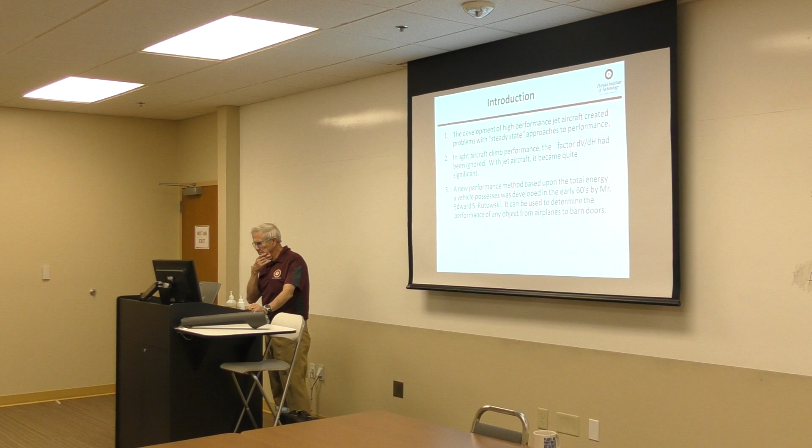One of the things that happened was that with the advent of high-performance jet airplanes, the steady-state climb approach didn't work very well. Number one, airplanes like the F-15 and the F-22, you can't achieve a steady climb at sea level. Both of those airplanes will accelerate going straight up.

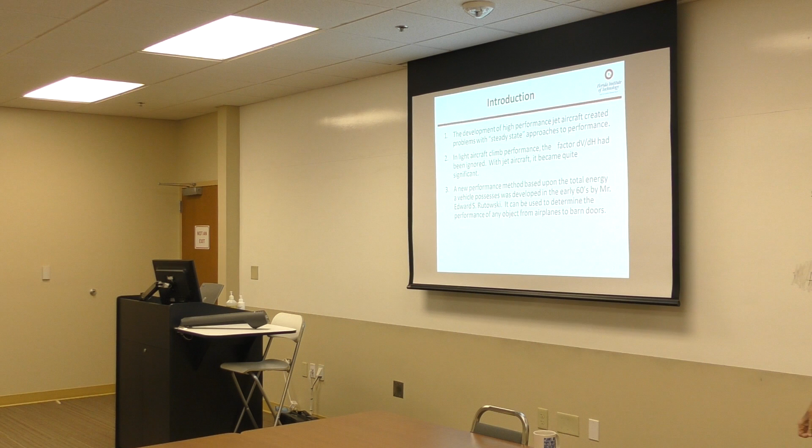So you had to come up with some other way of doing this. The other thing that showed up even earlier than that was that this method we just finished talking about has a problem. If the airplane has fairly high performance, we get into a problem with the change in airspeed versus altitude as you're changing altitude, or the DVDH term. With this method, we essentially ignore that term. That's one of the reasons that using this approach, we only take a slope at that one altitude, rather than doing all of those points. We're kind of alleviating the problem with DVDH, because as you go up in altitude, due to the change in density, the speed changes.

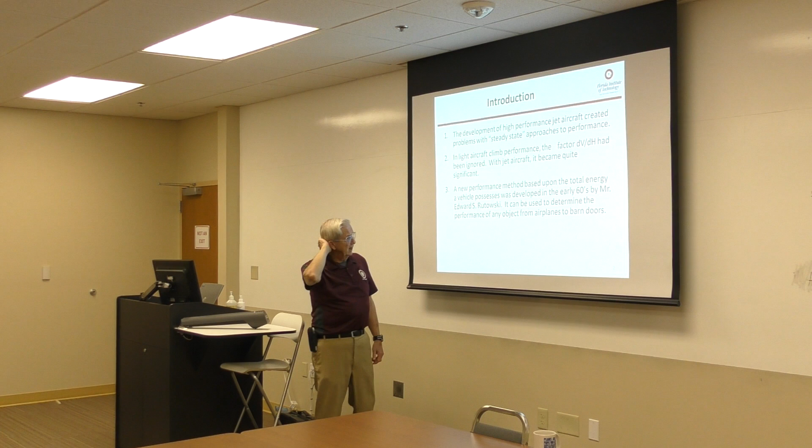So back in the 60s, that kind of raised its ugly head, and there was a fellow who at that time was at Douglas. That's a company that's gone its way, but Donald Douglas was one of the starters of the airplane industry, along with Bill Boeing and DC-3s. Essentially, when he built the DC-3, he almost put himself out of business, and then when he got to the DC-9, he did put himself out of business.

Why? Wasn't the DC-3 a successful airplane? Oh, the DC-3 was a very successful airplane. I went to war on the DC-3, okay? So DC-3s were around for a long, long time. In fact, the first airplane that we modified for the gunship program had its first IRAN, which means an overhaul, essentially. Had its first overhaul the year I was born. And this was in 65, when we did that airplane down in Miami. So yeah, DC-3s were around and were used very extensively in World War II.

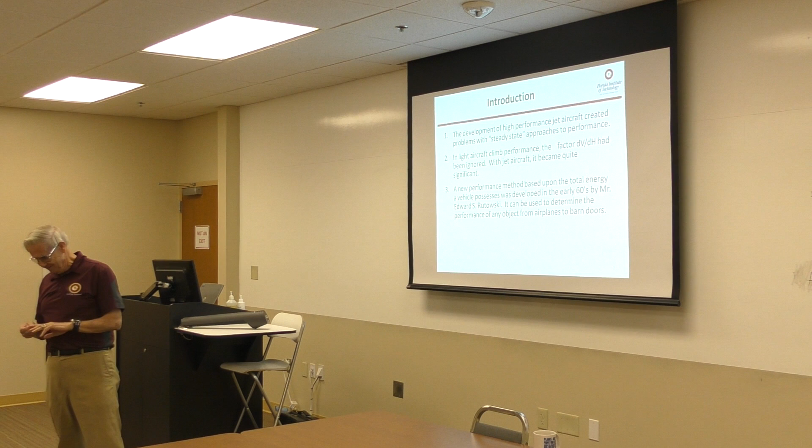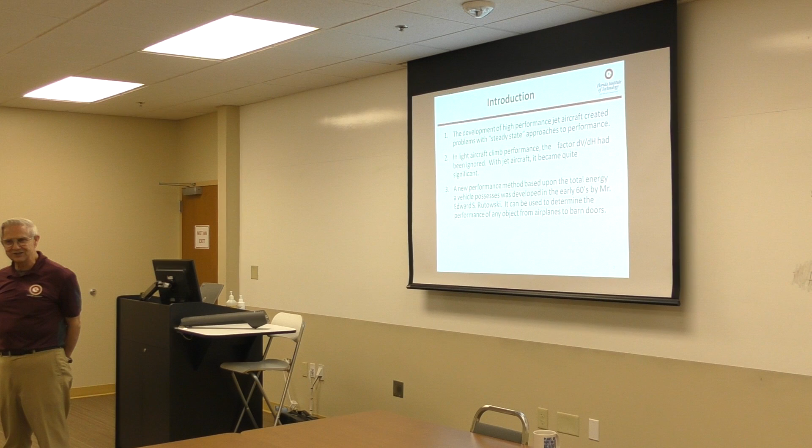It was just amazing. But anyway, those are some great airplanes, but getting back to Donald Douglas, of course he made a bunch of airplanes since then, but when he made the DC-9, he had a problem getting engines, and they had a whole bunch of inventory of airplanes without engines, and that forced the company into merging with McDonnell Aircraft in St. Louis, who was building the F-4 and those kinds of airplanes at the time. And of course now Boeing owns the whole thing.

But anyway, Ed Rutowski worked for Douglas, and he came up with the idea of this energy methods. He's credited with doing that. So we'll talk a little bit about energy methods. Essentially, it starts from the fact that the total energy of a system, doesn't matter whether it's airplanes or barn doors or whatever, is that you have, how high is it?

That's the potential energy. How fast it's going, so to speak, is the kinetic energy. So we can write this: the total energy is the weight times the height, plus weight times velocity squared over 2 times the acceleration due to gravity.

To normalize the equation for weight, we come up with a term called the specific energy, E sub S, and it's just the total energy over the weight of the airplane. E sub S, when we do that, looks like that. That's beginning to be a kind of familiar equation, isn't it?

But E sub S by itself doesn't tell you the performance. It has its units in feet or meters, depending on which system you use, and it's sometimes called energy height because it's in either feet or meters.

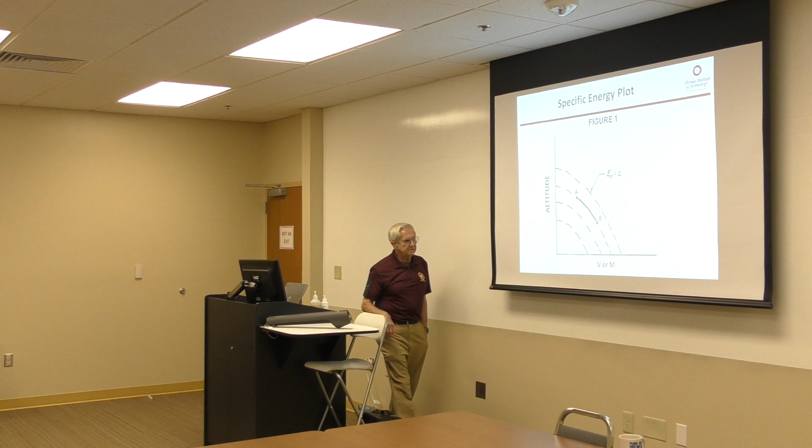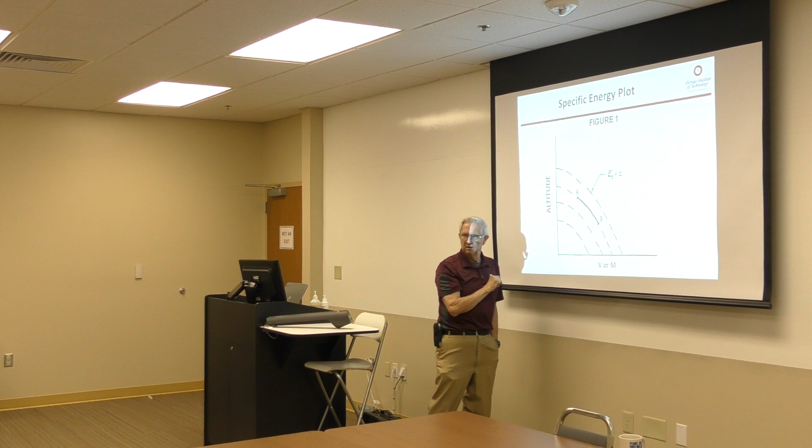You can plot lines of constant specific energy, and they look something like this. This is altitude, this is airspeed or Mach number, and this is a line of constant specific energy. Notice up here, it's all height, or all potential. Over here, it's all kinetic.

It tells us our energy state, but not what our performance is. So to define the performance, we have to determine how the energy state changes with time. So we differentiate it with respect to time, and now we have dEs dt.

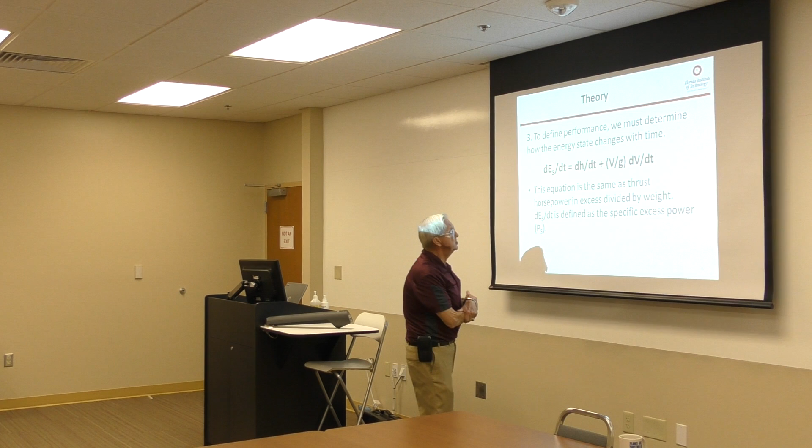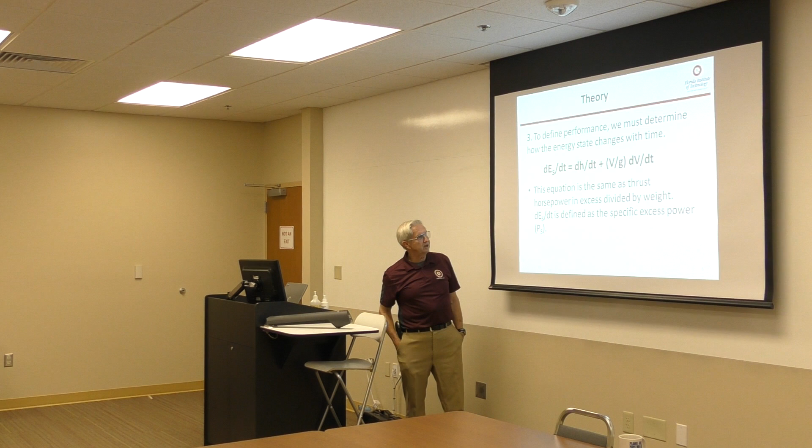We sometimes call that rate of climb, right? dH dt plus the acceleration, v over g times dv dt, or the acceleration. If you notice, that's the same as the thrust horsepower in excess equation divided by the weight.

So if we take that and divide it by the weight, we come up with a new term we call the specific excess power, P sub S. P sub S is just that derivative, and that also equals the thrust horsepower in excess, which we talked about before, over the weight.

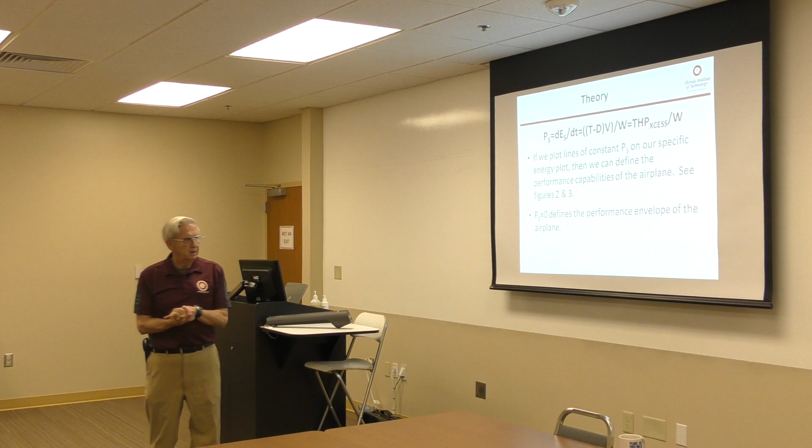Now, if we plot lines of constant P sub S on our specific energy plot, then we can define the performance capabilities of the airplane. Here's a subsonic airplane.

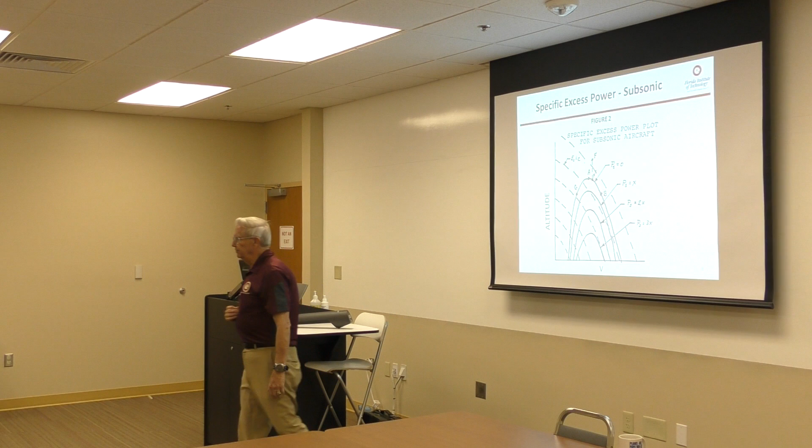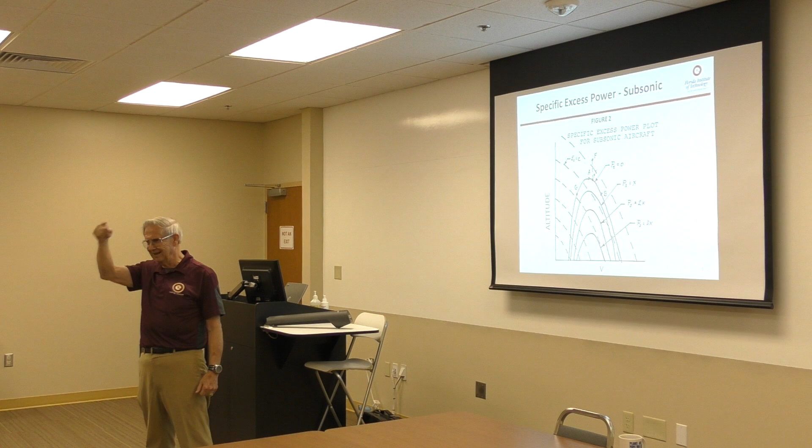Now, what's confusing about this to most folks, including myself, is that we talked about that rate of climb plot, how if we did different airspeeds we got different rates of climb, and that the anchors were stall speed, power-on stall speed, and maximum level flight speed, and then we had that curve.

These look like them, but they're not. They're kind of turned inside out, you might say, okay? Because when P sub S equals 0, that's the maximum performance of the airplane. This is as high as it can go. This is as fast as it can go.

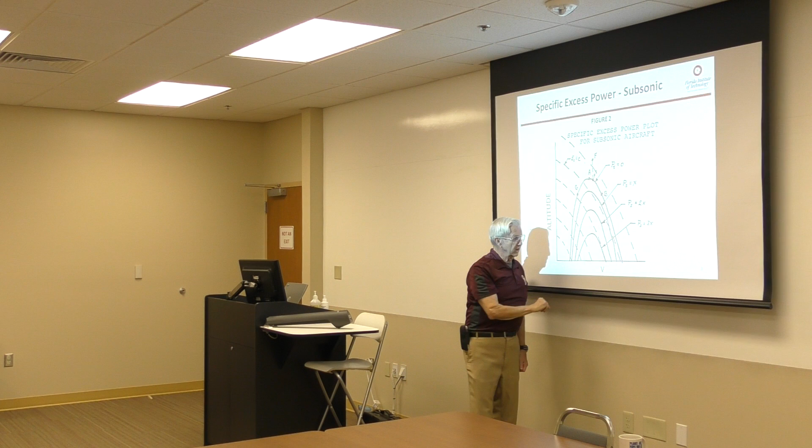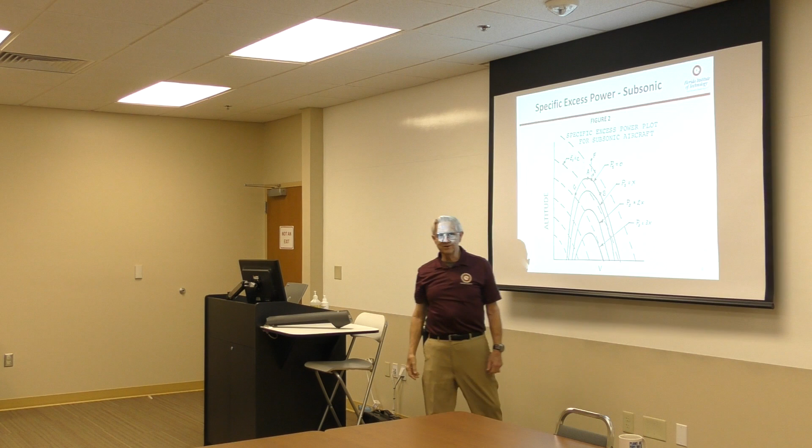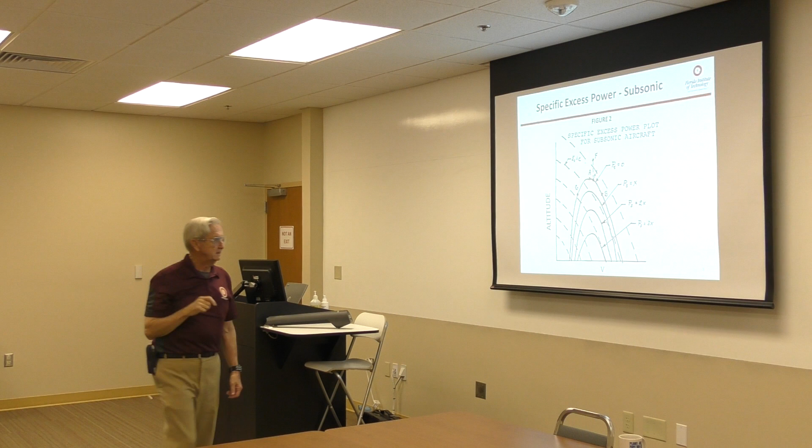And then again, down here, that's still stall speed, and this is increasing P sub S, whereas in the other plot of rate of climb, as the curve got smaller, that was smaller rate of climb, right? Well here, this is a greater rate of climb than this. Here is zero rate of climb. Here is maximum rate of climb.

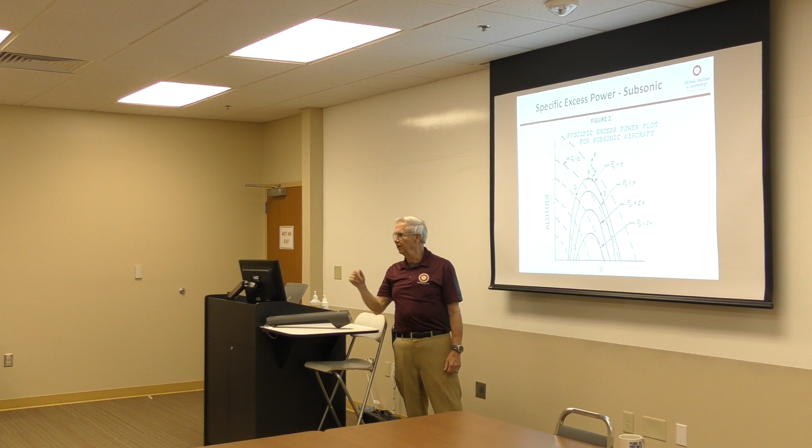Yes sir? When we talk about velocity and altitude, are we talking about density altitude and true airspeed, or do we use indicated and pressure altitude? You can use either one, I think, okay? But generally, this would be a true airspeed plot.

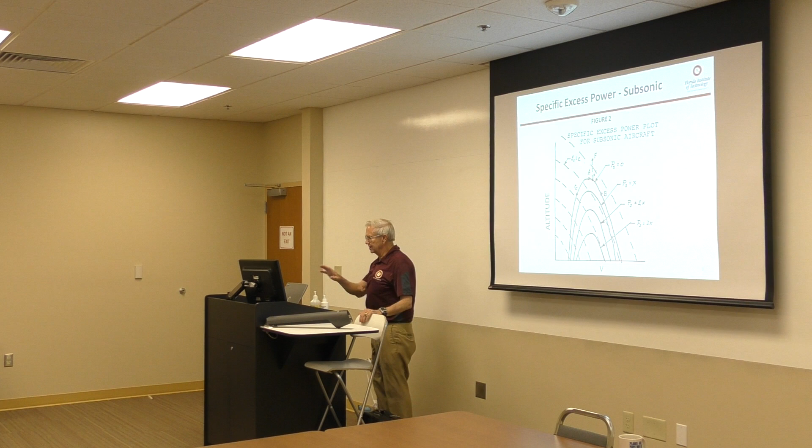Now, this is for a subsonic airplane, and like I say, this outside plot is the performance envelope of the airplane.

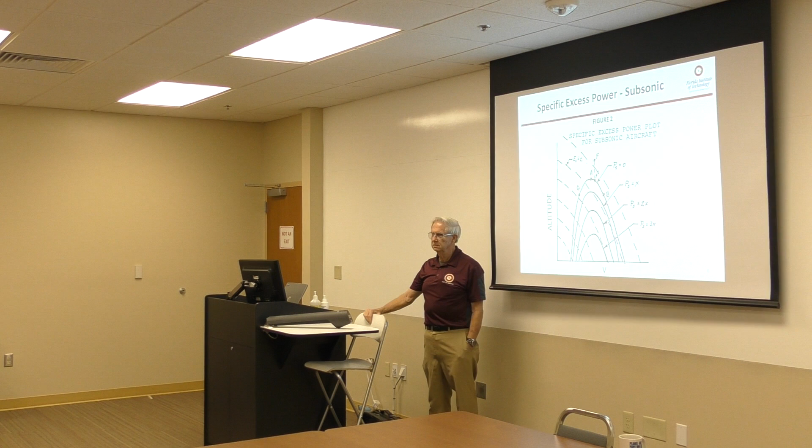Now, when we go supersonic, here's the kind of thing that happens. It grows a cancer, right? It gets a big cancer out here. This is Mach 1, okay?

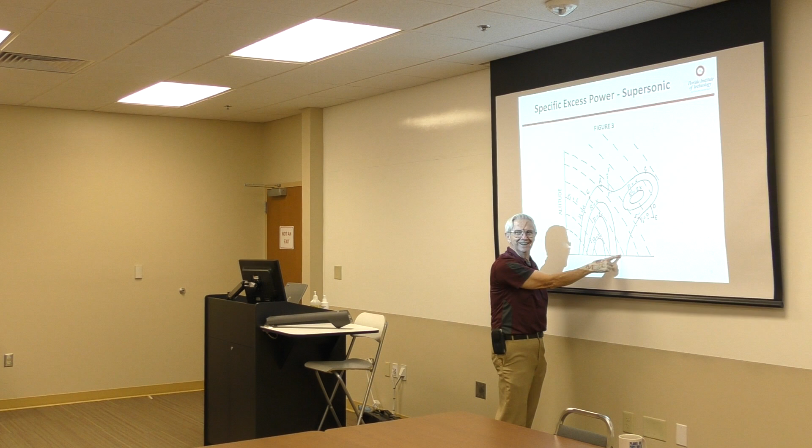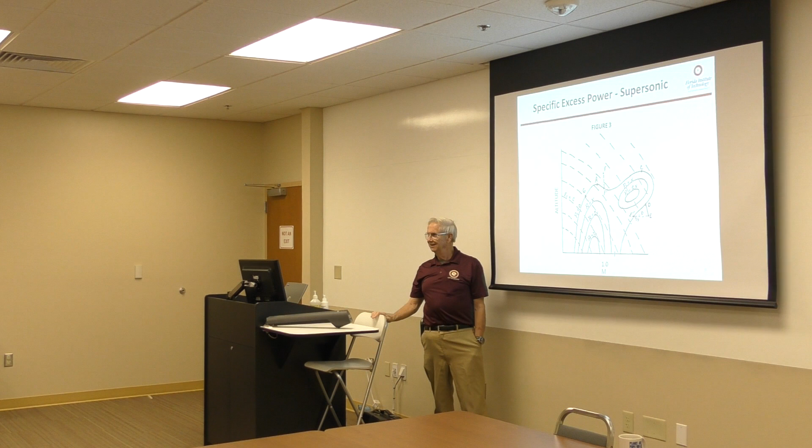So what does that tell you about the airplane? How, if you wanted to get to this maximum energy state out here, how would you get there? What's the fastest way to get there?

Well, you would climb along this plot where these lines of constant specific energy are tangent to the P sub S lines. You'd climb along that, get up here, and then you would dive along a constant energy line to go supersonic, and then climb out this way.

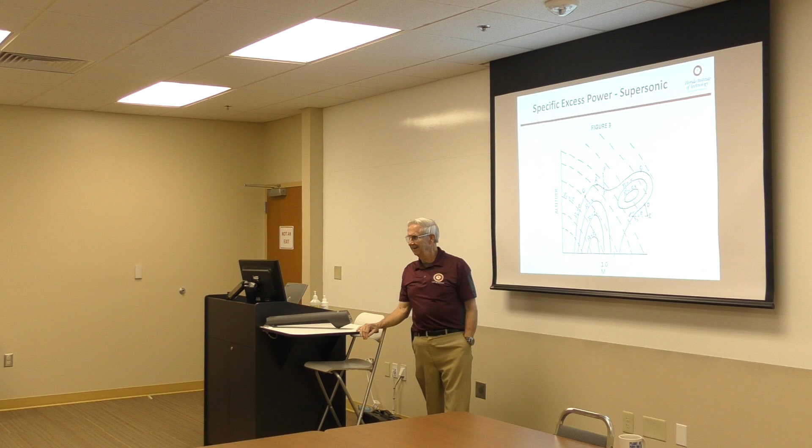Which is the envelope, the last one, right? The P sub S equals 0, is that the envelope? Yes, that P sub S equals 0 is the outside, the total envelope of the airplane.

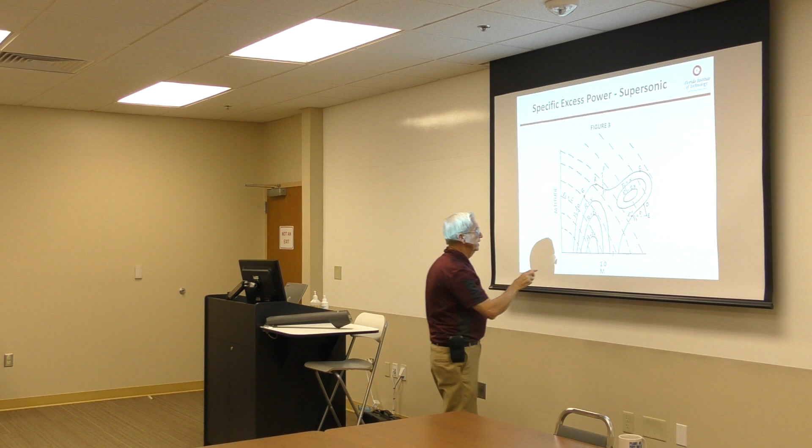So if you were flying an interceptor airplane and you wanted to intercept an incoming bad guy, and you wanted to get up to him in a hurry, you'd go like this: dive, go supersonic, and go out like that.

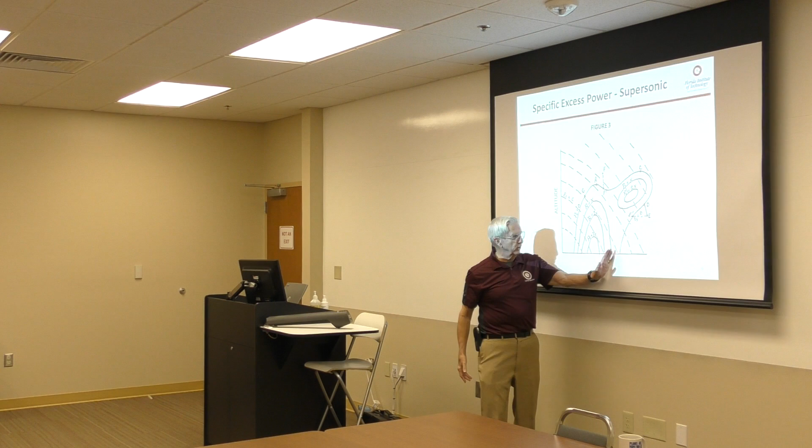So you can see the drag of what's going on here. This is a transonic drag rise.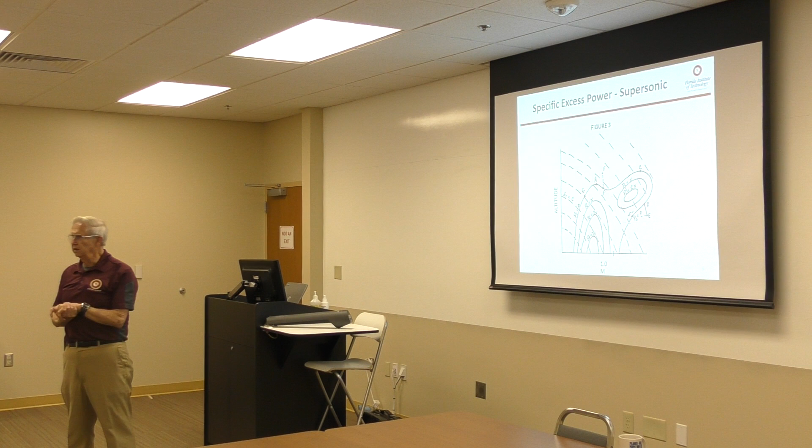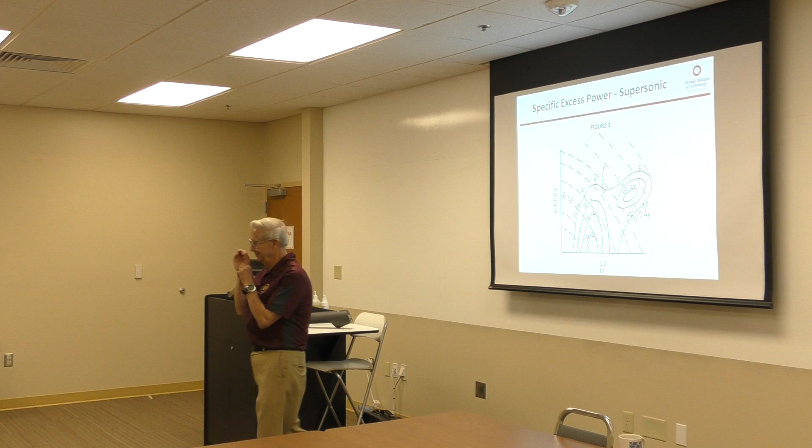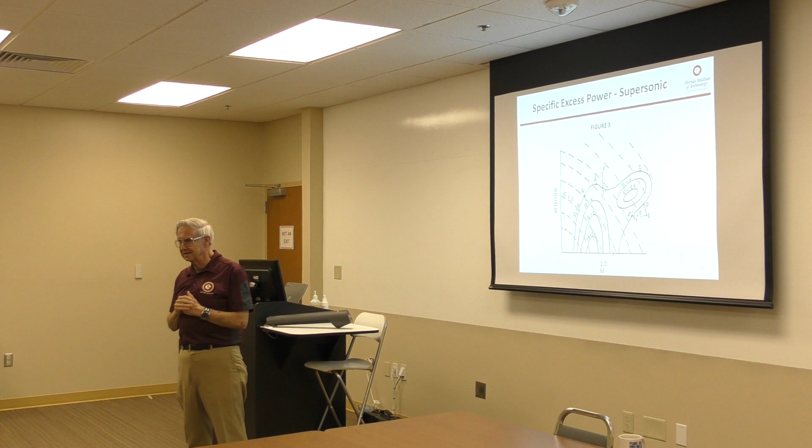I suspect they still have it, but back during the days when we were concerned about fighting the Soviet Union, fighter pilots in the U.S. had plots of this for all of the competitive airplanes, so they knew where to go to have an advantage. They had a plot of that which they could overlay with data from their own airplane and tell what speed and altitude was best to have a performance advantage. That was one of the ways this stuff was used. There were little guys around with funny little small cameras taking fuzzy pictures of Russian airplanes, and from those fuzzy pictures and photogrammetric techniques, they could come up with these kinds of plots. And a few other things, but anyway, that was one of the uses.

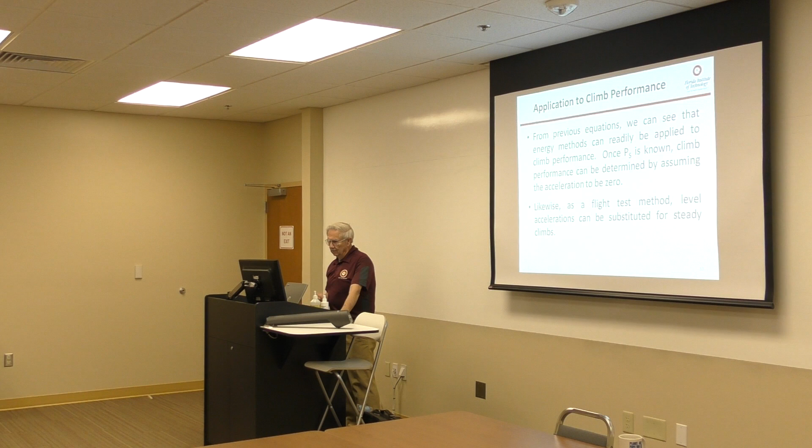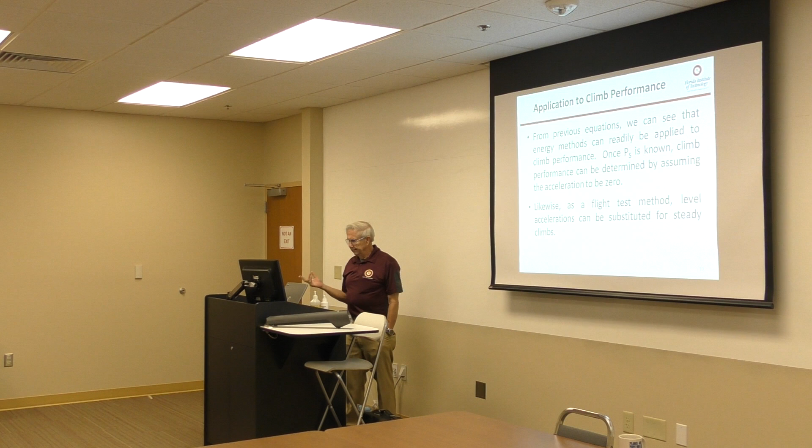We can apply them to climb performance. Once we know excess specific power, P sub S, you can determine climb performance by assuming that the acceleration is zero. So as a flight test method, we can say okay, well we just won't climb, we'll stay at an altitude, and we'll accelerate, and we'll measure the acceleration, and then we can calculate the climb.

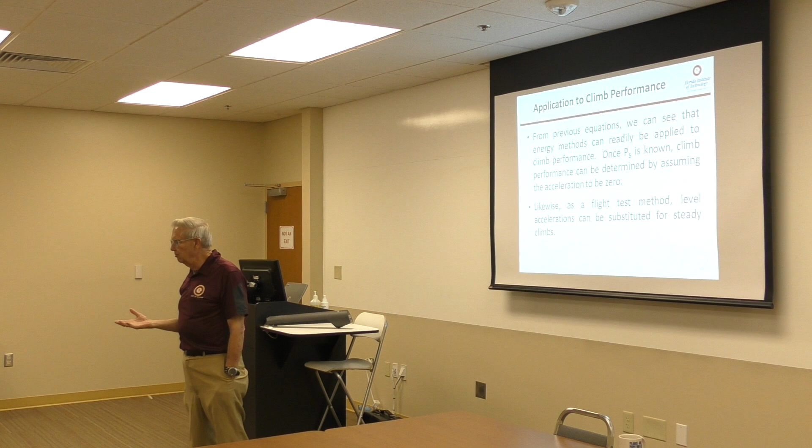So on very high performance airplanes, high performance fighters, that's the method, as opposed to doing steady climbs.

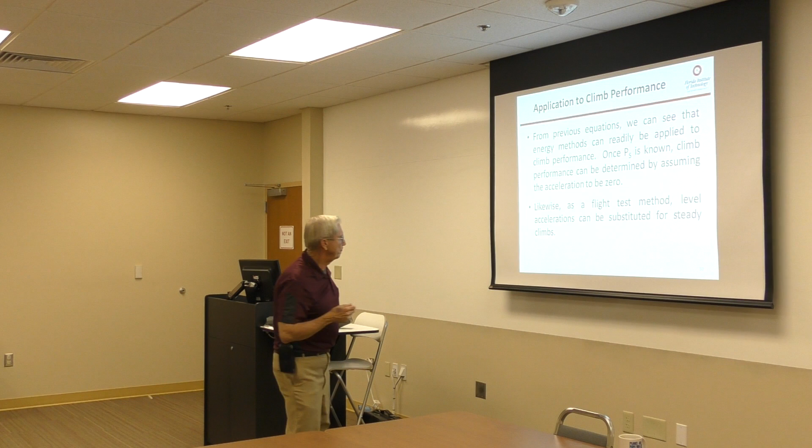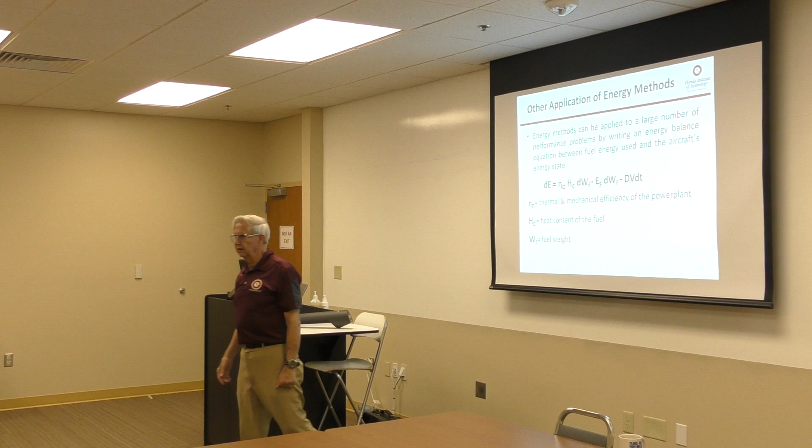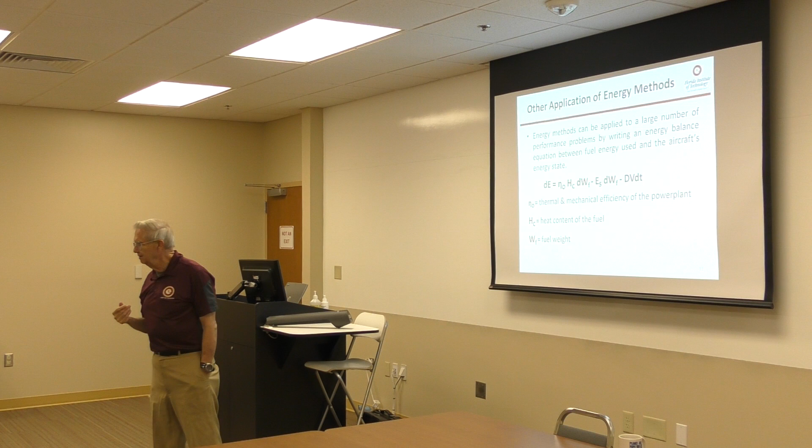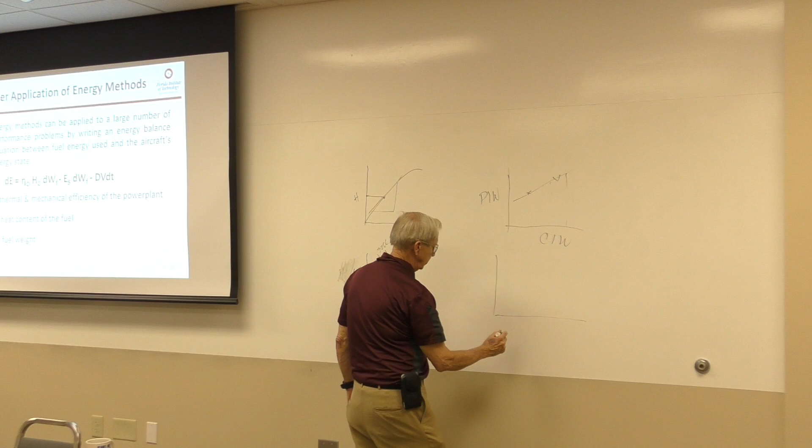And you go to full power and start your stopwatch, and every so many seconds you read the airspeed. So what you get is a plot that looks something like this, where you have time and airspeed, and you'll get a curve that'll look something like this.

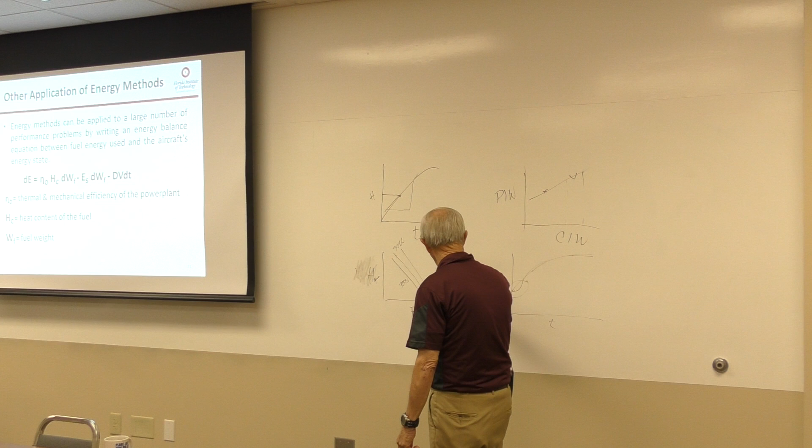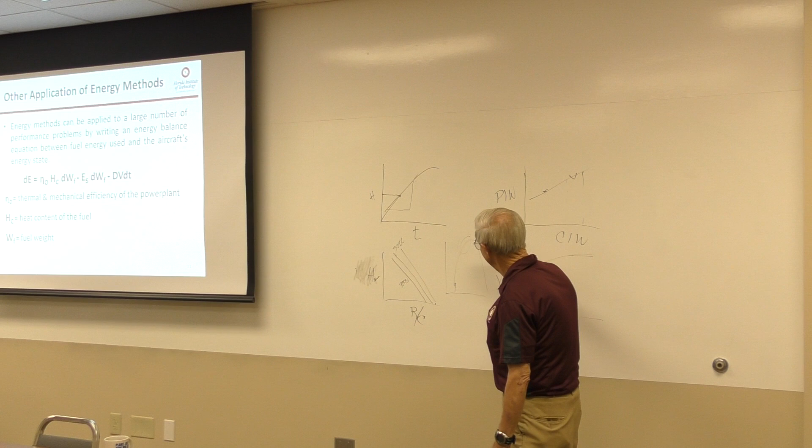I show this point, this area right in here. What happens, this is pretty small, it may be hard to see this sometimes in the data, but you need to get that. Because when you plot this thing up, if you just say oh that's just data scatter and plot it like this, what happens is you only get half of the curve, because from this you're going to develop this rate of climb curve. Except if you don't get this little plot, that's this part of the curve. So if you just straight line that there, you only get this half of the curve. So you need to not ignore that point.

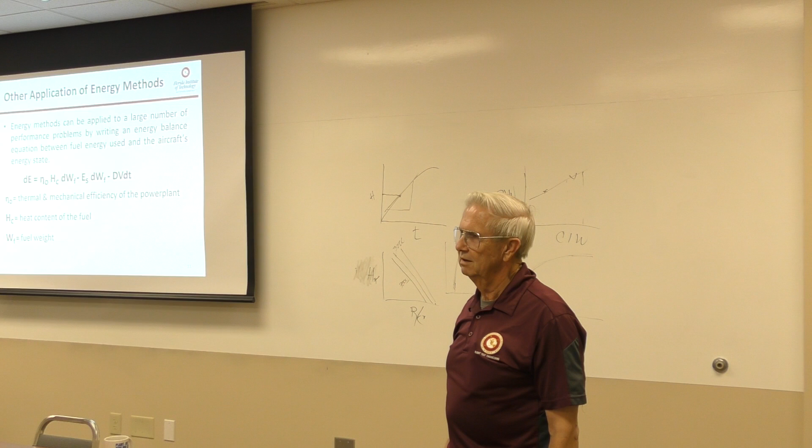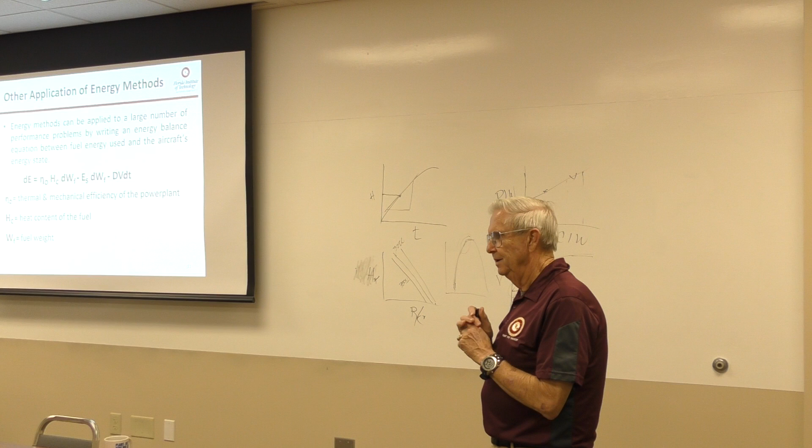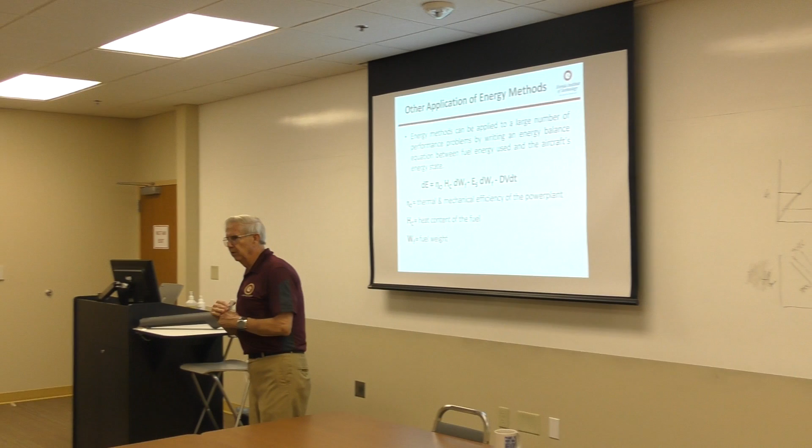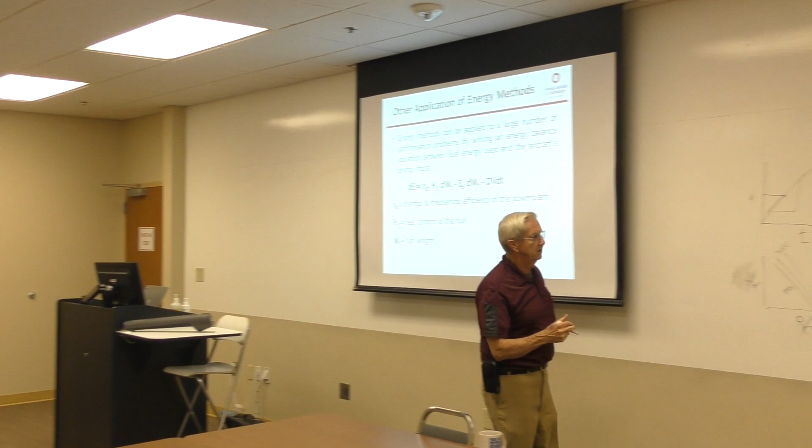So what happens, what kind of a curve do you get for a jet airplane for power? It looks something like this, right, where this is power and this is velocity. It's pretty much a straight line from, say, zero airspeed. As you increase in airspeed, because power is equal to thrust times velocity. So if we plot a power required curve on here...

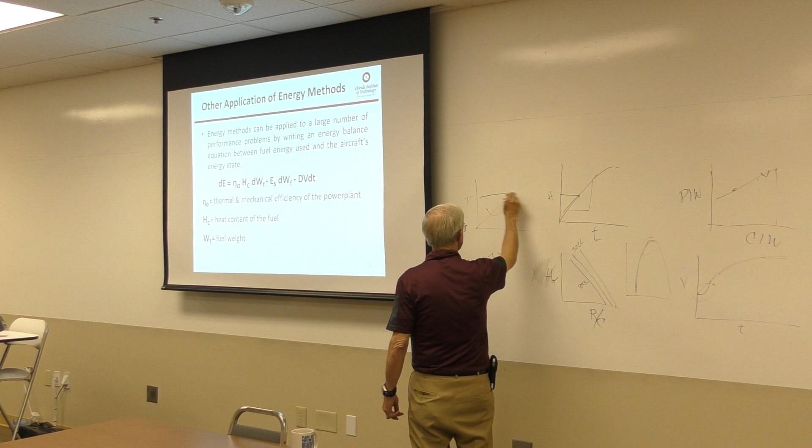A jet airplane's best rate of climb speed, which is the maximum difference between these two curves, is going to occur at a much higher airspeed than an airplane like the Cherokee 6, because its curve looks more like this. So the maximum difference between these two curves is going to occur at a higher airspeed than that.

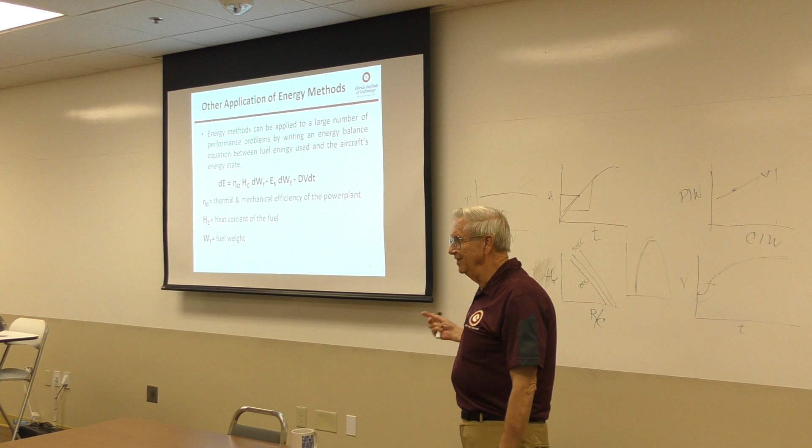So most jets, if you've flown a jet airplane, you'll find that you climb at a much higher airspeed, even though the airplane may be somewhat comparable to a light airplane. For instance, the T-37, which I flew as a fledgling pilot, you climbed at a much faster airspeed than you did on most GA kinds of airplanes because of this relationship.

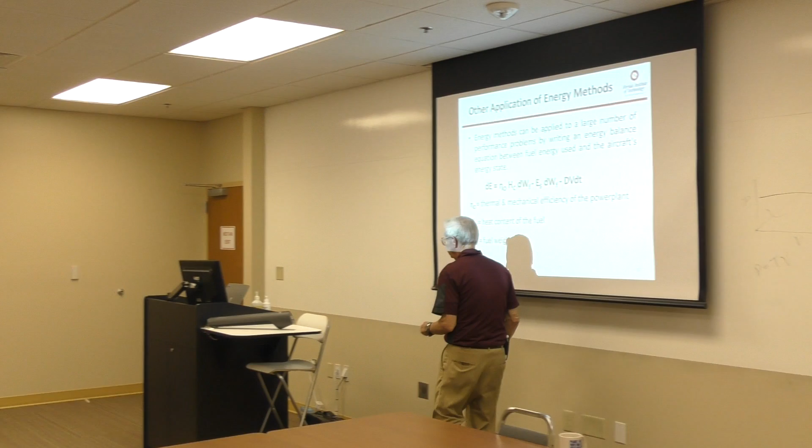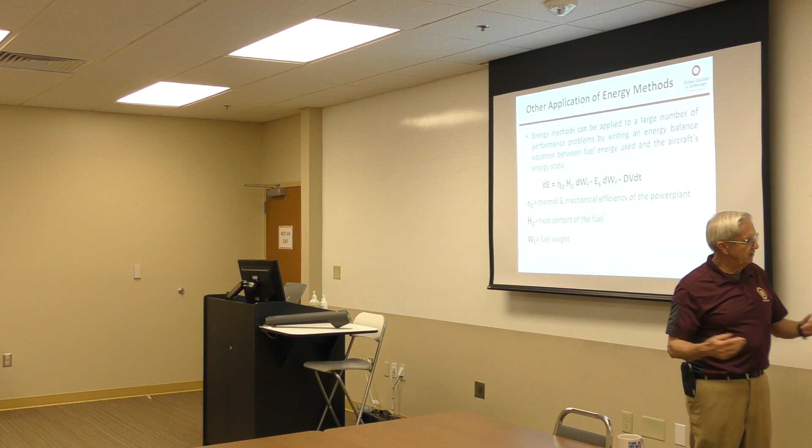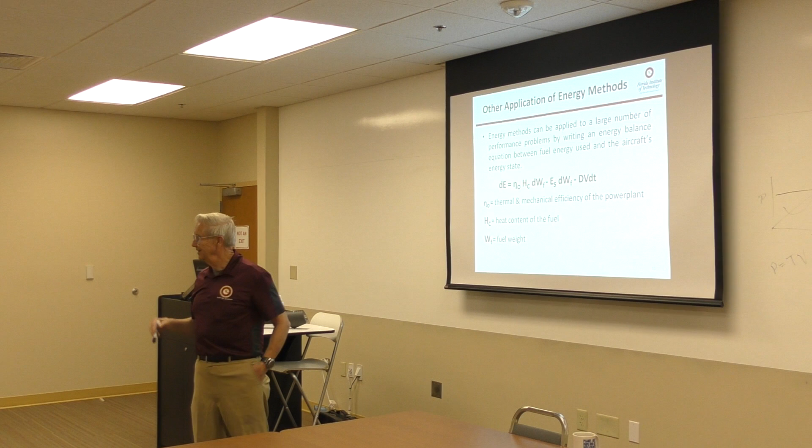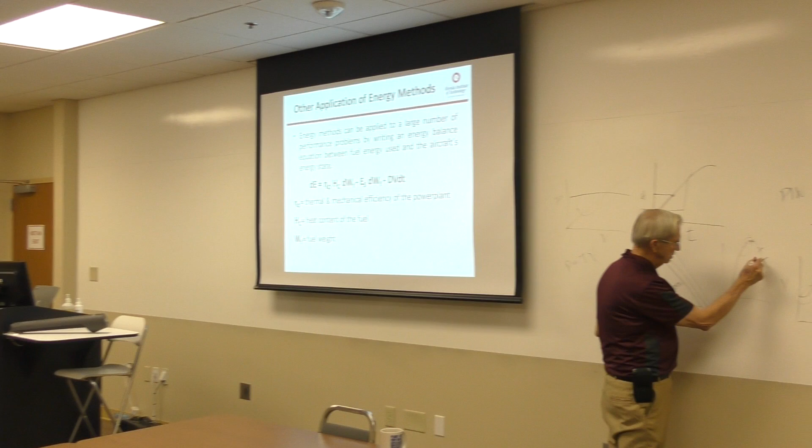So what happens here, before I go away from these curves: when you do this level of acceleration, when you do this curve, you are developing this whole curve. Now that may be a way to determine what the best rate of climb speed is for even a light airplane. Because what did I tell you we had to do to determine the best rate of climb of, say, a Cherokee 6? We got to go up here and fly climbs at all these different airspeeds to define this curve. That takes a lot of time, and that only gives us one altitude, whereas we could go up and do an acceleration.